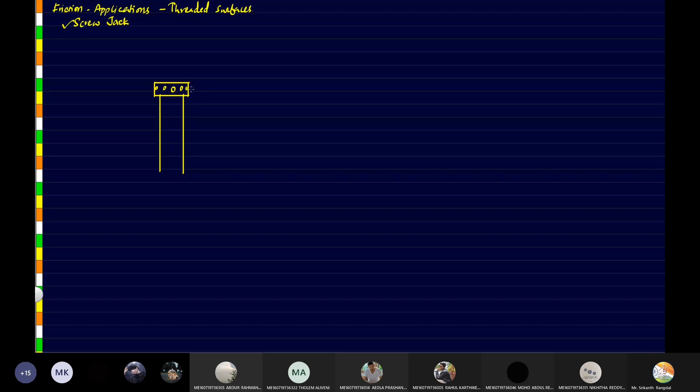In one of these holes, we are going to insert a lever. So this thing here is a lever, this you can say is the head, and this here is the screw.

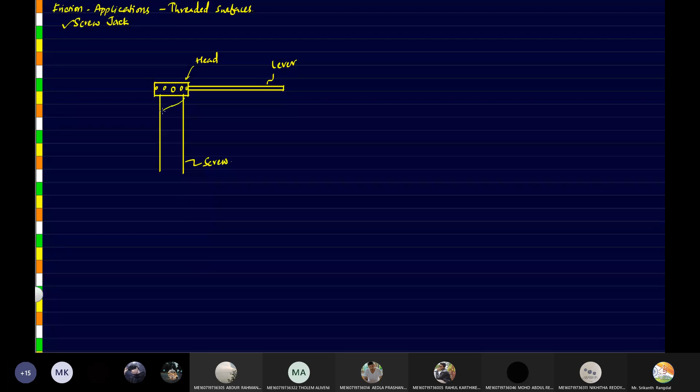Now this screw will have a number of threads on itself. So these things, they are threads.

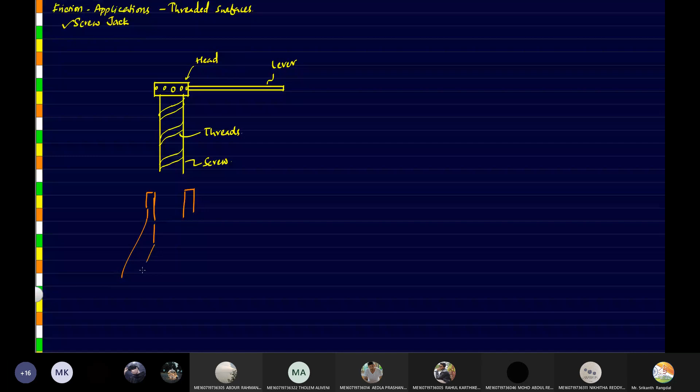So now these threads, they're going to be fitted into a bottom part. The bottom part is going to be somewhat like this - you must have seen this object in machine drawing. So this is the rough shape; I'm just drawing the cross section.

There may be another replaceable device in the middle, but the inside of this will have threading. So this threaded screw is going to fit inside this bottom base.

So whenever we rotate this screw, what will happen? Whenever we rotate the screw, this part will be moving up or down.

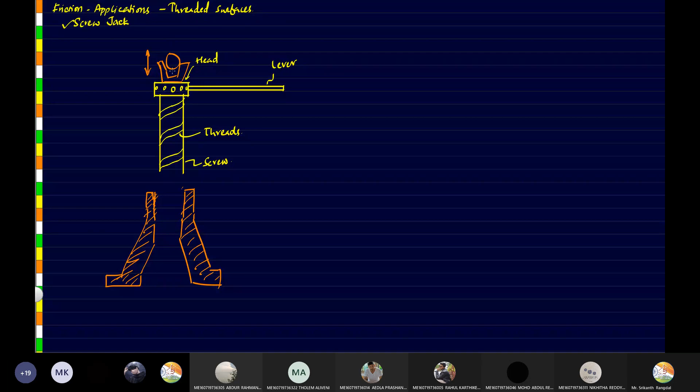We may have an additional object called a crown. The crown is the one which will come in contact with the vehicle part, and because the crown is not going to rotate along with the head, it's free to rotate. So that's how the object is going to be lifted.

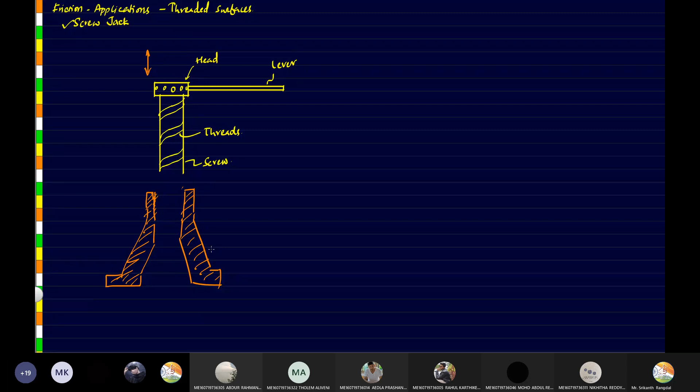So we don't have to worry about all this stuff. Let me just delete it. Let's focus on the thing that we have to study.

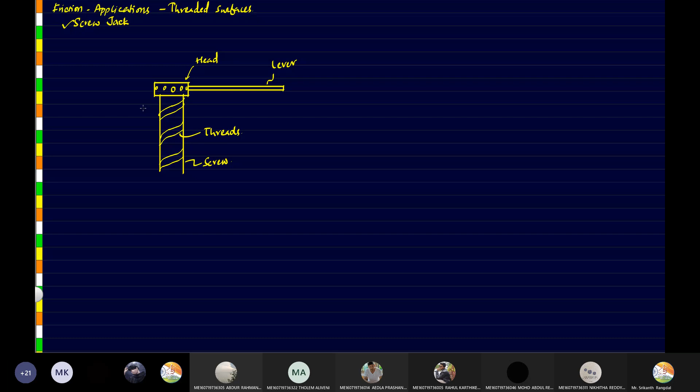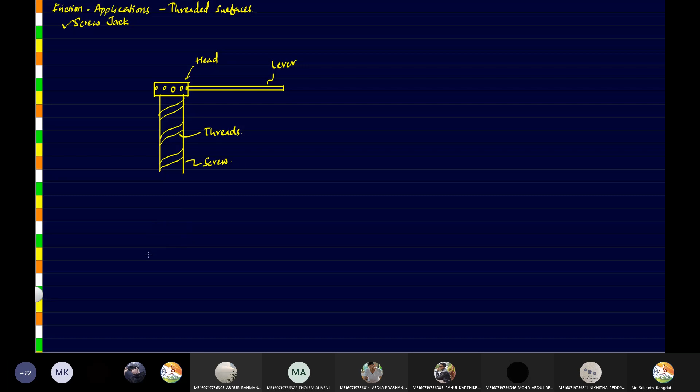Let me just draw a top view of this. The top view is where we will see the forces acting. This is the lever, the same lever which you are seeing in the front view.

Now the force that we will apply, that force we will be applying here in the top view. So let us say the force that we are applying here is F.

So we want to find out this force F that will be required in order to lift this object. The weight of this object, let us call it W. We can also write it as m into g, where m is the mass of the object that we are lifting, g is the gravitational acceleration. So W is the weight that we have to lift.

These are the threads here, on the lever F is the force that we are applying. So our aim is to find the formula for F.

Now this we are going to do in various steps. We have to do a derivation. So this is where the derivation starts.

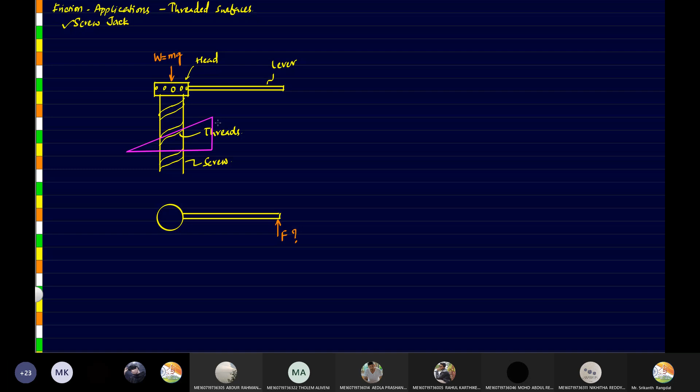First of all, what we have to do is we have to open the thread of one pitch. So this distance that we have here, this distance is equal to the pitch. What is pitch?

What is pitch? The distance between two successive crests. In this case, we have threads, so we'll be talking in terms of threads - the distance between two successive crests of threads.

When we open the one thread of one pitch, what will be this distance? If this distance here is the diameter of the screw, what will be this distance? It's like opening a circle, right? So this will be the circumference. What is the formula for circumference? Pi into d, isn't it?

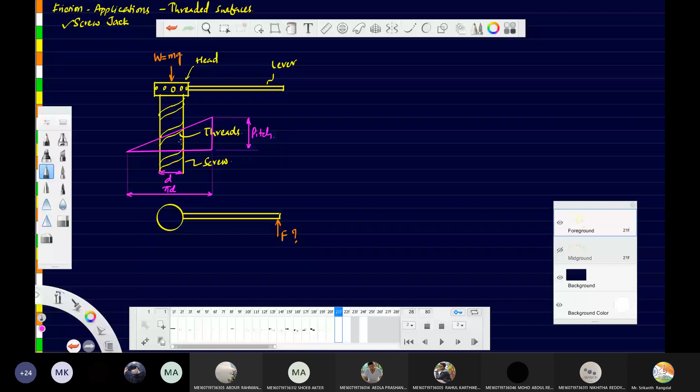Is this understood? Are you clear about this? Yes, sir. So now we'll have to draw the same triangle. Let me draw it slightly bigger here.

Straight up. So I've drawn this slightly bigger. Now the screw that we have here, that will be similar to a box that is sliding over this. So this diagram we have converted slightly differently. It's the same diagram, but we have shown this screw in the form of this box.

This helical thread, we have opened it for one pitch and we are showing it like this. So this length here is equal to the pitch. This here is the circumference, that is pi d. This angle here I'm going to call alpha.

Now some forces will be acting on this block. What are the forces acting on the block? One force is the downward force. How much is the downward force? Downward force is W, or M into G.

Then we are going to apply a horizontal force. Where are we going to apply that force and how much will it be? This force will be applied here at the diameter. Let us call that force as P.

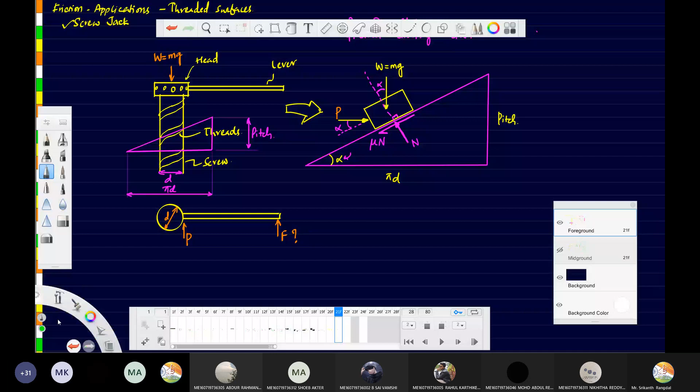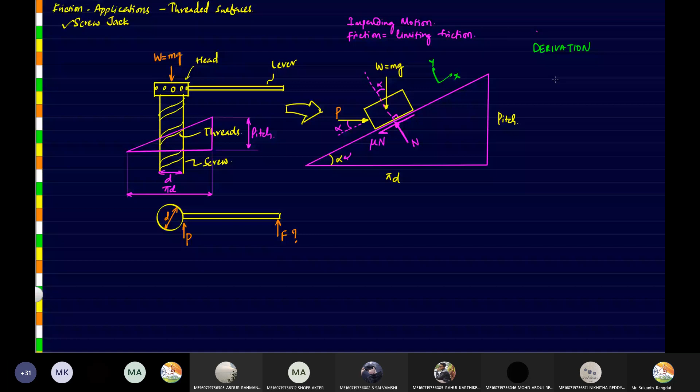So let's take these two directions, this as x and this as y. Now first let us take sigma of all the forces in the x direction. When you take that, P is acting in the direction of x, so it will be positive. What is the component of P in the direction of x? That will be P cos alpha, and because it is in the same direction as x, we are taking it positive.

Any other forces which are acting in the x direction? W is also inclined to the x-axis, so a component of that will also act in that direction. So how much? What is the component?

W into sine alpha, and that component will be acting opposite to x-axis, hence we have to take it as negative. So minus W sine alpha. And there is one more force, the friction force. Friction force is also acting opposite to x-axis, hence we have to take it as negative, minus mu n.

Now we are taking it as impending motion, and impending motion means the object is still not moving. It is about to start moving, but it has not started moving yet. And because this is the condition we are taking, we have to assume that this is in static equilibrium. Hence, this total we can take it as equal to 0.

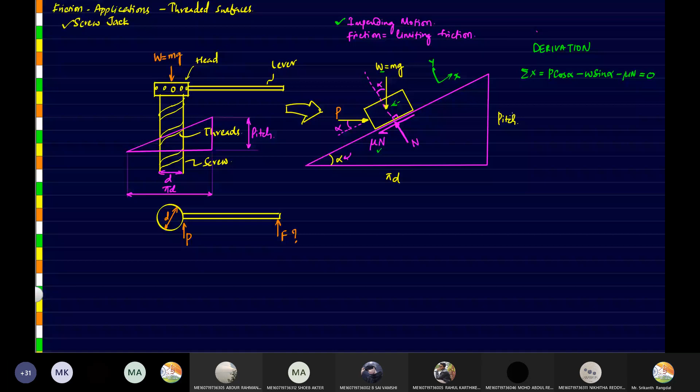We just have to focus on this diagram. So I'll just expand this here like this. Now let us send this term to the other side. So we get P cos alpha minus W sine alpha equals mu into n. We will call this as equation number 1.

Similarly, we will have to take the sum of all the forces in y direction. Now you can see n is the force which is acting upwards, so we can take n as positive because it is in the same direction as y. Now the two components we have to take: W into cos alpha is acting downwards, opposite to y, so minus W into cos alpha. And P into sine alpha will also act downwards, so again it has to be minus. So minus P sine alpha.

So once again, because it is in static equilibrium, the sigma of these forces will also be equal to 0. Now the negative terms, let us shift to the other side. So we get W cos alpha plus P sine alpha equals n. This we will call it as equation number 2.

Now we can substitute equation number 2 in equation number 1. So what do we get? We get P cos alpha minus W sine alpha equals mu multiplied with n. So wherever n is there, we'll just substitute this value, that is W cos alpha plus P sine alpha.

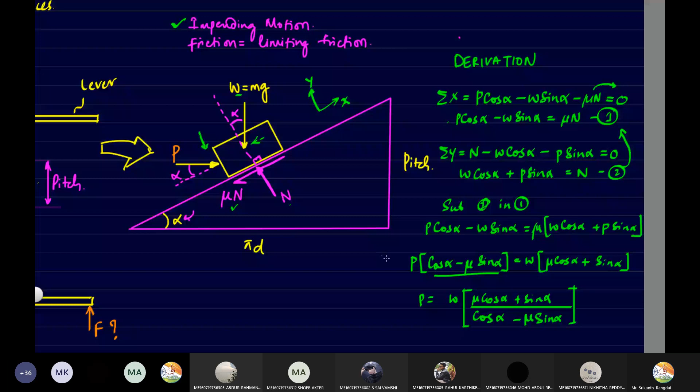Can we simplify this further? No, sir. Let's divide by cos alpha in numerator and denominator.

Numerator and denominator both we will divide by cos alpha. So what will happen? P will be equal to W, and cos by cos will cancel. We will be left with just mu. And here sine by cos we will get, what is sine by cos? Tan. Tan, very good. And then coming to bottom also we are dividing by cos alpha, so cos by cos, again it will cancel. We will be left with 1 minus mu as it is. Sine by cos, once again we will get tan.

So this is a simplified version. Now we can simplify this much further. So let us say theta is angle of friction. If theta is angle of friction, so what is the relation between mu and theta? Mu equal to tan theta.

And for alpha, how will you find alpha? Alpha we can find by using this triangle, right? Alpha we can find using the pitch by pi-d triangle. This is pi-d and this is pitch, right? So tan alpha will be equal to opposite, that is pitch, divided by the base, that is pi into d, right? So this is the relation for alpha and this is the relation for theta. So let's go ahead, substitute that.

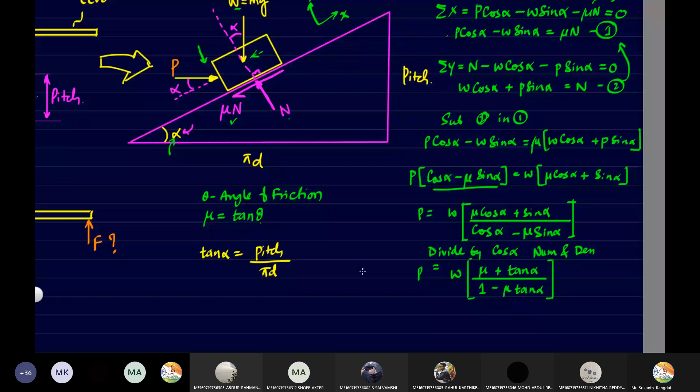So P equals W into tan theta plus tan alpha, we will keep it as it is, over 1 minus tan theta tan alpha.

Now looking at this equation, does it remind you of something from trigonometry? Yes, this is the expansion of tan(A+B). So we can simplify this as W into tan of theta plus alpha. Now this is a very simplified formula, easy to remember.

So here is one more situation we'll have to assume. This is for lifting. Now if you are lowering the screw jack, how will the formula change? The direction of friction will change. So theta is the friction, and we will get alpha minus theta instead. This is for lowering. Combining these two, we can write P as W into tan of alpha plus or minus theta.

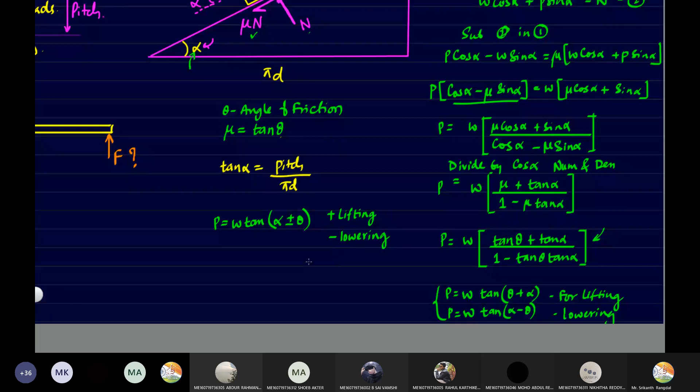Now we know the relation between P and W. But we don't want P now, we want F, because we are not applying the force at the diameter of the screw, we are applying it at the edge of the lever. So we'll have to find the relation between P and F.

This is the simple moment theorem we can apply. So P into that distance from the center, which is D by 2, and this total distance let us assume it as L. Now applying the law of moments, P into diameter by 2 will be equal to F into L.

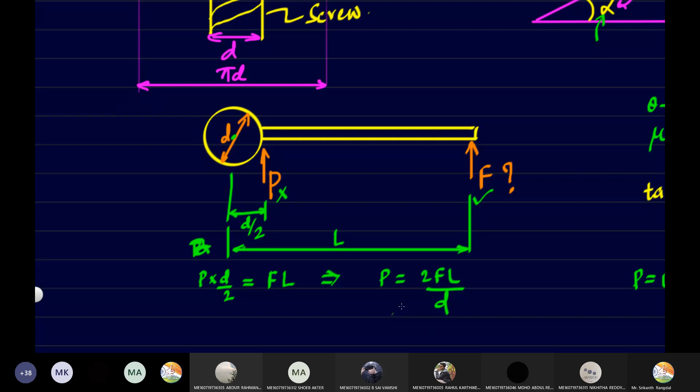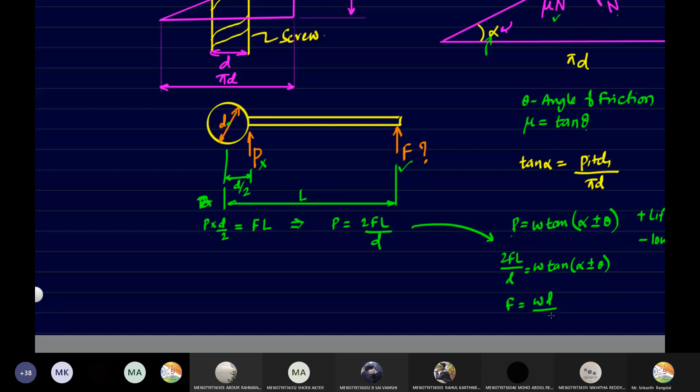This implies we need the formula for P now. So P will be equal to 2 times F into L over D. We substitute this in the equation we got earlier: 2FL by D equals W tan(alpha plus or minus theta). Sending all other terms to the other side, we get F equals WD by 2L into tan(alpha plus or minus theta). This is the final formula we'll be using for problems.

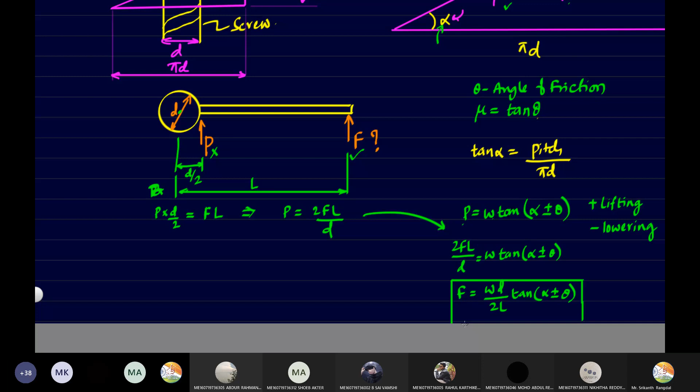If we come across the problems, this is the formula we'll be using. So is the derivation clear? Any doubts here?

So once again, let us note down all the notations. W is the weight to be lifted. D is the diameter of the screw. L is the length of lever. Alpha is called the helix angle. Theta is the angle of friction. Is any other term left? Alpha, theta, D, L, okay everything is covered.

Only F is left. F is the force applied, force applied on the lever. P is the resultant force, you can say P is the resultant force on the screw, while F is the applied force on the lever. So these are the notations we are using, and this is the formula we'll use in the problems.

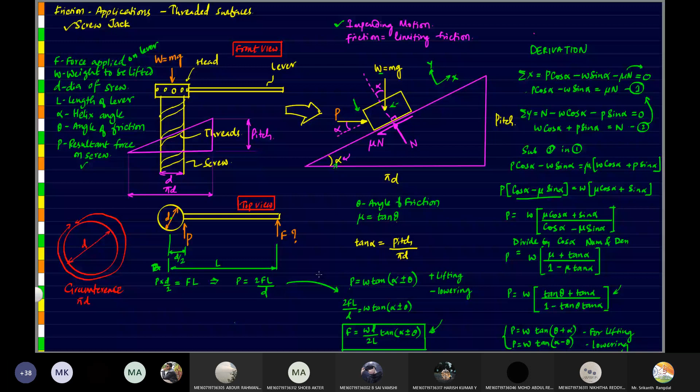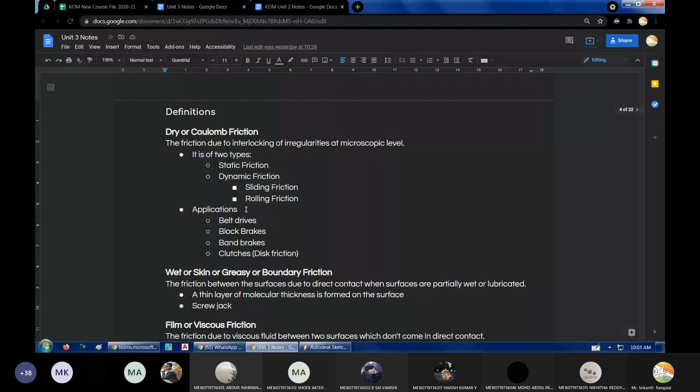So now again, we'll have to use the same formula that we learned yesterday, and we have to do a derivation to find a relation between the torque required to move it and the weight that is acting on this collar. Okay, so let's begin.

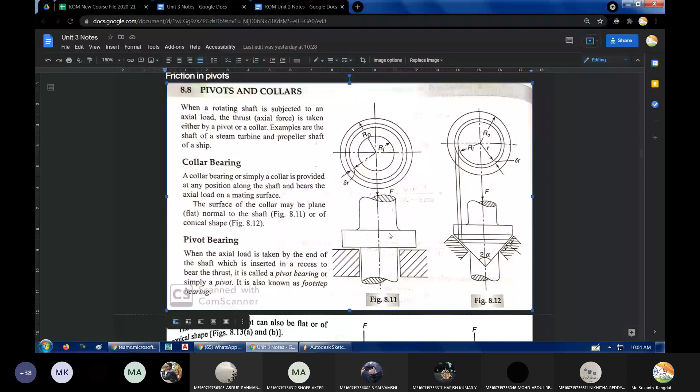Collar bearing. So we can start with a circle. Okay, so this is the outer radius and inner radius. So the surface contact is between these two radii. Okay, so the inner radius, let us take it as r inside, ri, and the outer radius, let us take it as r out, r in and r out.

So next we will have to take a small area. Fine, we'll have to assume a small elemental area. Okay, and here this distance from the center, let us take it as r, and the thickness of this small strip, let us take it as dr.

This small area dA, which I'm shading right now, is going to be different at different radial distance, right? This area will be different at different radial distance, and as the area changes, the normal reaction will change, and we know friction is dependent mainly on the normal reaction. So the friction will also change, and the friction will directly affect the torque. Fine, so this is how our derivation will start.

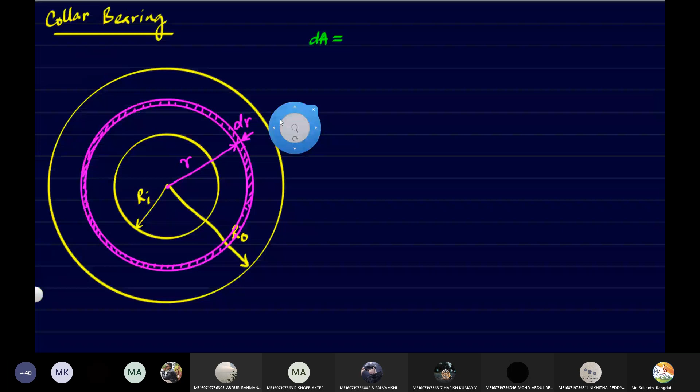How to find the area of the small strip? We will use a simpler formula. Fine, we will not use the area of larger circle minus area of smaller circle. Fine, we'll use a slightly different approach to this, and that is the circumference 2 pi r into the small thickness dr.

Okay, 2 pi r is the circumference of the strip and dr is the thickness. Fine, so what we are doing here is the circle is there, we are opening the circle, we are making a cut here, we are cutting at this point and opening the circle. So this length will be equal to circumference, and the thickness will be equal to dr. So this is like a rectangle, no? This is like a rectangle. Circumference is equal to 2 pi r and the thickness is dr.

So length into breadth we can use directly here. Fine, and because this thickness is very, very small, it's a differential amount, it will not create any error in the formula. Fine, so dA is the small area and that's equal to 2 pi r into dr. So I've explained here how it is done.

Now let's assume uniform pressure. Fine, so we are assuming that the pressure is uniformly distributed, which means the pressure P is constant. Fine, so now let us find the normal reaction on the strip. So we all know the formula for pressure is, what is the formula for pressure?

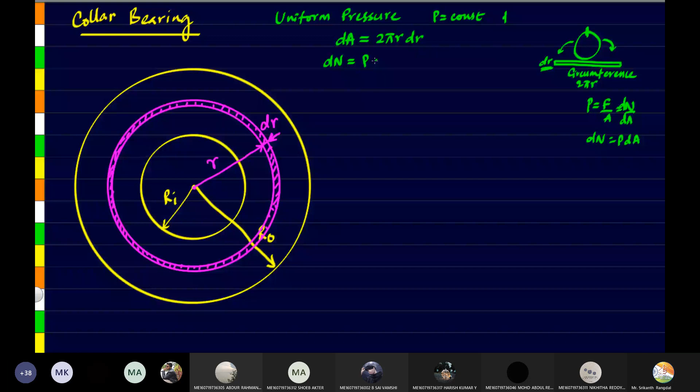Pressure is force by area. So in our case, force is the normal reaction and area is dA. dN is the small amount of normal reaction, dA is the small amount of area. So dN equals P into dA. Let us substitute the formula for dA: P into 2 pi r dr. This is the small normal reaction acting on this small strip that we have chosen.

This normal reaction will result in a small friction. What is the formula for friction? Mu into N. So in place of N, we put dN. We know the formula for dN, so let us substitute: mu into dN, and dN we replace with P into 2 pi r dr. This is the small amount of friction.

This small amount of friction will result in a small amount of torque. What is the formula for torque? F into R, F into r, radial distance. So in our case, F is the small friction force dF, and we need the radial distance.

What is the radial distance? Radial distance is dr plus R. Only r, R is enough, since dr is very small so we can ignore it. So dF into r is the formula.

Now again substitute for dF. We get mu into P into 2 pi r into dr into r. So this is the total formula for the small amount of torque.

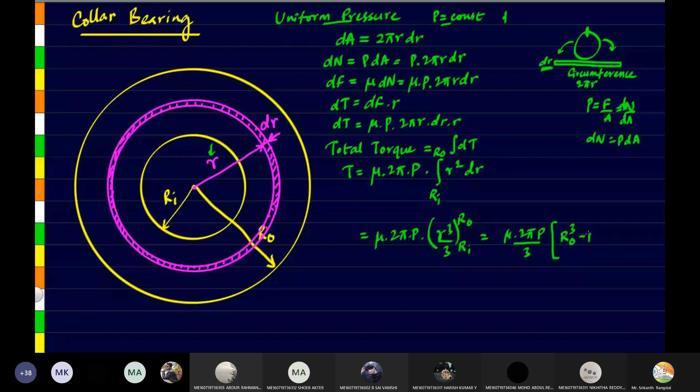Now we don't know the value of pressure, but we know the value of the weight that is acting. So we need the relation of torque with the weight. W is the weight that is acting, so now we have to find the relation between pressure and the weight.

We know the formula for pressure, that is force by area. So in this case, total weight divided by total area. What is the total weight? Total weight is W. And what is the total area?

Here we need to be careful about the total area that we are talking about. This is the total area that we are talking about.

Can we use the same method that we used for dA? No, we cannot use it. Why did we use that method there? Because the thickness dr was very small, so we just took the circumference and multiplied by the thickness. But for these circles, the thickness is not ignorable, so we cannot use that formula for circumference.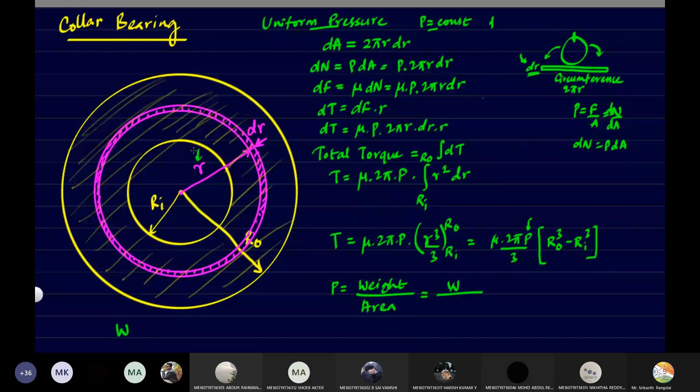We'll have to use the difference in the areas: area of the larger circle minus area of the smaller circle. This is how we have to use it, and this is the formula for pressure. Let me call this equation 1, and this equation 2.

Substitute equation 2 in equation 1, so we get the torque formula as pi into 2 by 3... sorry, p is what we have to remove, right? So in place of p, let us substitute this whole thing wherever p was there.

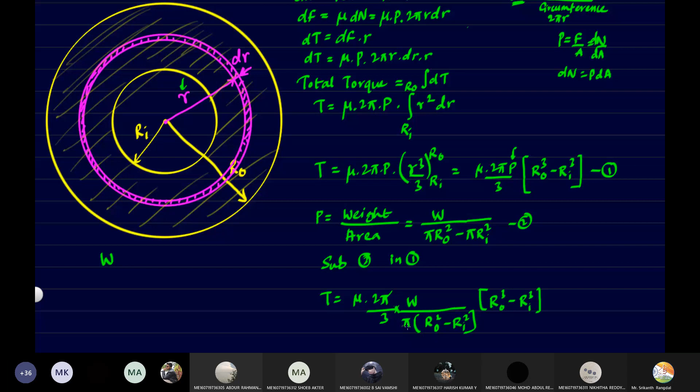That is w divided by pi. Let us take it common: R out square minus R in square, and this term as it is, that is R out cube minus R in cube. So pi will cancel out, and we can simplify this into: mu into w into 2 by 3 times R out cube minus R in cube by R out square minus R in square. So this we can further simplify into an equation like this.

What is R mean? R mean value is equal to this value: R, 2 by 3, R out cube minus R in cube, by R out square minus R in square. So this is the value of R mean, and this is for uniform pressure. This is for uniform pressure. So this is the formula.

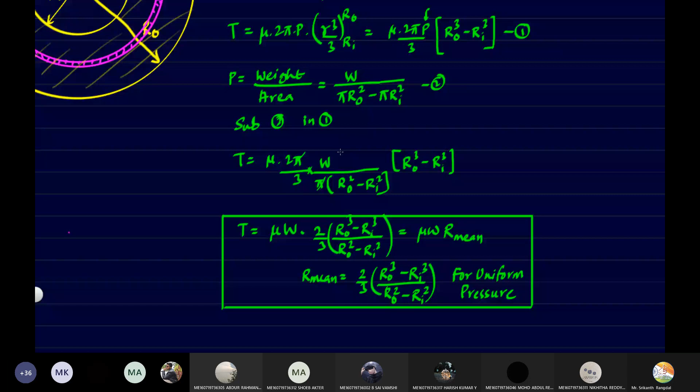So whenever you come across problems on collar bearings, whenever you come across the formula for collar bearings, and if in the question it is mentioned that the pressure is uniform, then you can apply this method.

Now the same derivation we can do in another way. Now the pressure, most of the times, will not be constant, it will not be uniform in some cases. So instead of pressure, the wear will be uniform. What is wear? You already know what is wear, wear and tear. So uniform wear.

So in uniform wear, pressure is not constant. Actually R into P is constant. So assuming this, the derivation is going to be slightly different. So first of all, let's find the relation for P.

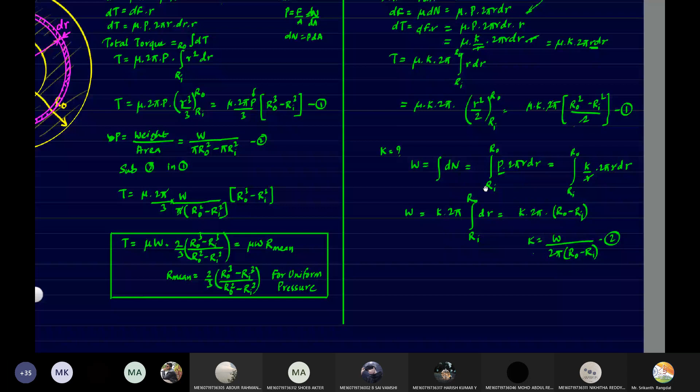This gives us the formula for K. So K will be equal to W divided by 2 pi, R out minus R in. This value of K we'll have to substitute in the formula we got here. Let me call this equation 1 and equation 2. So now I'll substitute 2 in 1.

So the total torque here will be equal to mu into pi, and where K is there we have to substitute this W by 2 pi, R out minus R in, multiplied with R out square minus R in square. So pi will cancel. Can we simplify this further?

A square minus B square can be expanded as A plus B into A minus B. A minus B will cancel, and we are left with R out minus R in by 2... R out plus R in by 2. So once again this formula can be reduced to the similar format we got before, that is mu into W into R mean, but here R mean value is slightly different. Sorry, minus will cancel and plus will remain. So this is the formula.

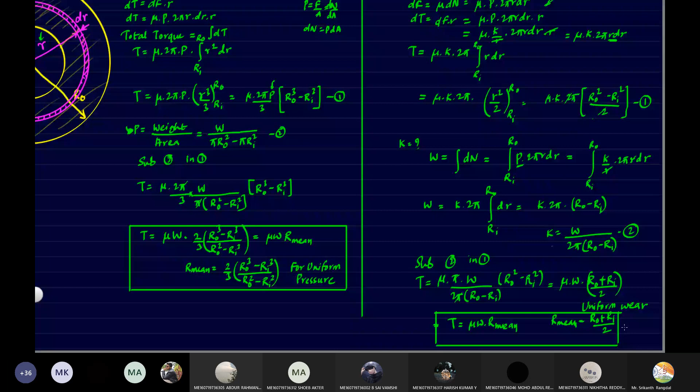So when should we use this formula? This formula should be used for uniform wear. Both these formulae we can just combine into a single formula.

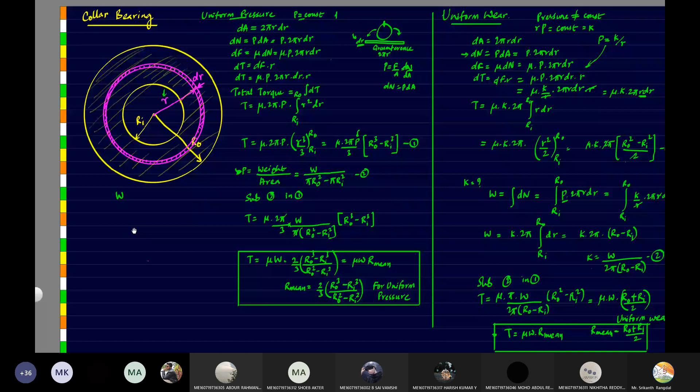So the single formula is mu into W into R mean. R mean value is different for different cases. For uniform pressure, R mean value we'll have to take as 2 by 3, R out cube minus R in cube by R out square minus R in square. This is the value of R mean for uniform pressure.

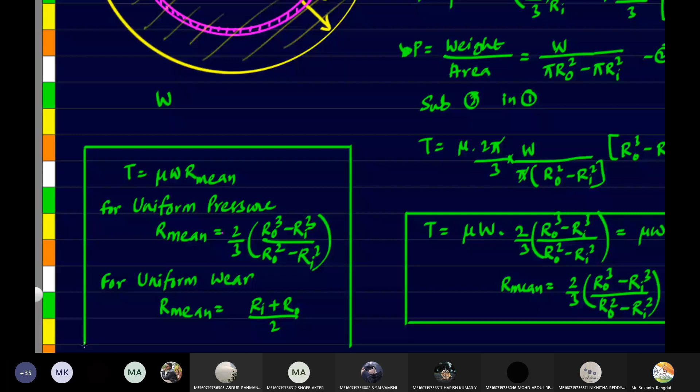And for uniform wear, R mean value is just the average, R in plus R out by 2, right? So if you remember this formula, you will be easily able to solve this problem.